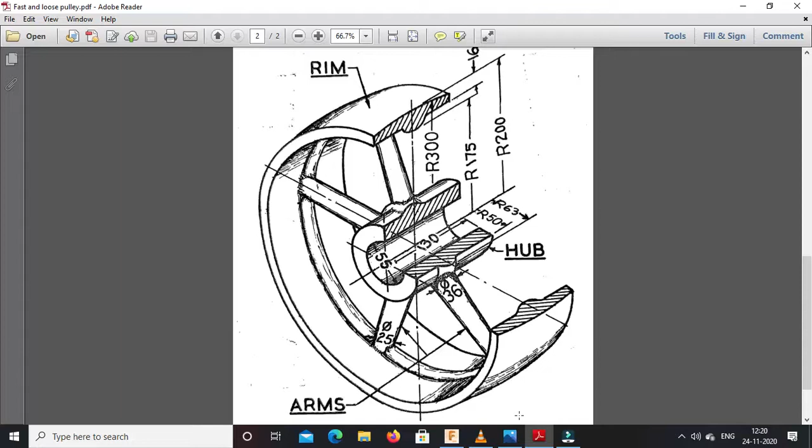Now how is it used? Let us suppose this shaft is there, and this another shaft is there. This is called the driving shaft, that means motion - let us suppose this is an engine shaft, the engine output shaft, it is called the driving shaft. To this shaft one pulley is attached, with the help of a key. So whenever this shaft rotates, this pulley also rotates, so it is called a driving pulley because the motion originates here.

So it is called a driving pulley, and this is the other shaft. As per the requirement, we want to transmit motion from this shaft to that shaft. That means whenever this shaft is rotating, as per our requirement, we want that shaft to be rotating or stopped. So whenever we want to transmit the motion, we will make one arrangement, and whenever we want to stop motion transmission, we will make another arrangement. So now how is it achieved with the help of a fast and loose pulley?

This rectangular portion is nothing but the belt, made of leather or any rubber material. I think in the flour mill, the ancient flour mill, you have seen the belt drive. So there is a wheel like structure, a pulley, and over that one belt is provided.

Okay, so whenever the driving pulley is rotating, along with that shaft will move, that belt is going to move over the other pulley, and it will also rotate the other pulley. So it is called a belt drive.

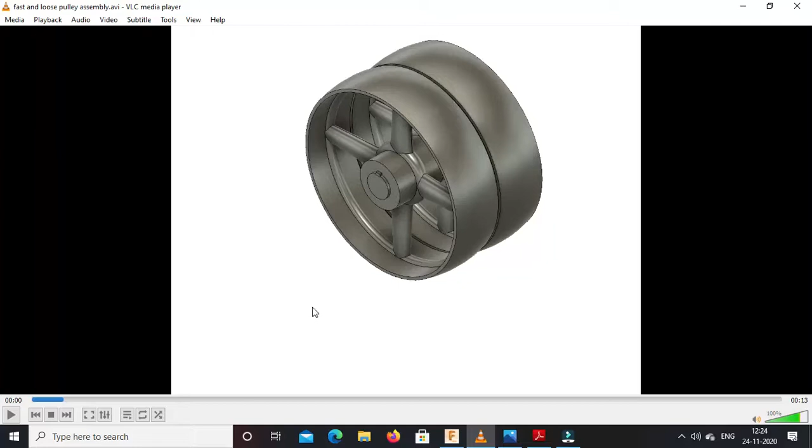So if I run this video, you will see the animation, how those parts are connected. So this key is going to come outside, then this fast pulley. If you observe, this is the loose pulley.

One more component is called a bush. So this part is called a bush. It is fitted on the shaft, but there is a loose contact. That means if this shaft is going to rotate, there is no locking between this shaft and bush. So the bush will remain as it is. So whenever the pulley is going to rotate, it is not going to transmit motion to this shaft. The loose pulley is going to rotate all alone.

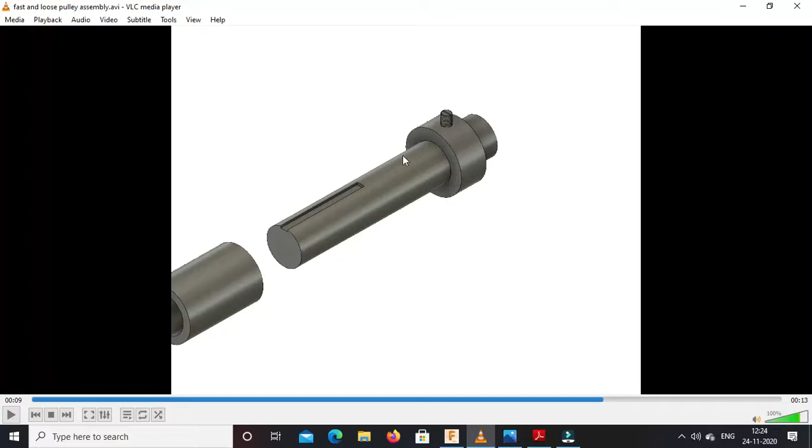And this is one locking arrangement. It is a collar, the circular ring part is called a collar, and it is attached to this shaft making use of a screw, or a pin-like structure. So this is nothing but the arrangement of the fast and loose pulley.

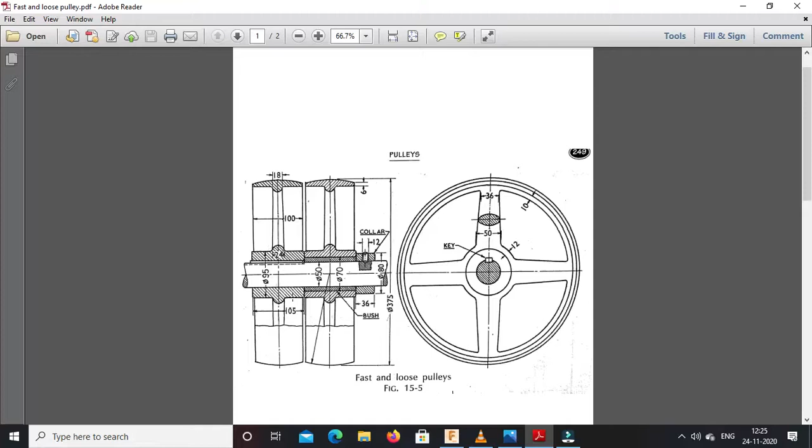So we need to prepare these parts on the Fusion 360 software. Now, how the pulley is - this is basically the view for the assembly. This is the sectional front view, and this is the side view.

Okay, so if you observe, this pulley has 4 arms. These are the 4 arms of the pulley, and this outer part is called the rim. This central part is called the hub. Now in order to find out its dimension, you must be able to correlate those two views.

Now if you observe, this hatch portion is in the form of an ellipse. So the cross section of this arm portion is in the form of an ellipse. So this arm is in the form of an elliptic shape, not circular, though it appears so in this diagram.

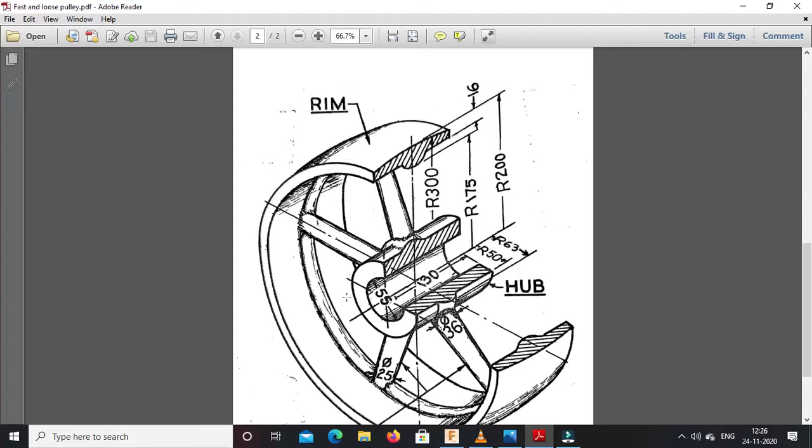Now what is the diameter of the shaft? If you observe over here, this diameter is 50, which is nothing but the shaft diameter. Then the outside diameter of the hub - just do not consider these dimensions given on this diagram. In our case, this central diameter is 50, and this outer diameter you need to find out from this figure. So this is 95, this diameter is 95.

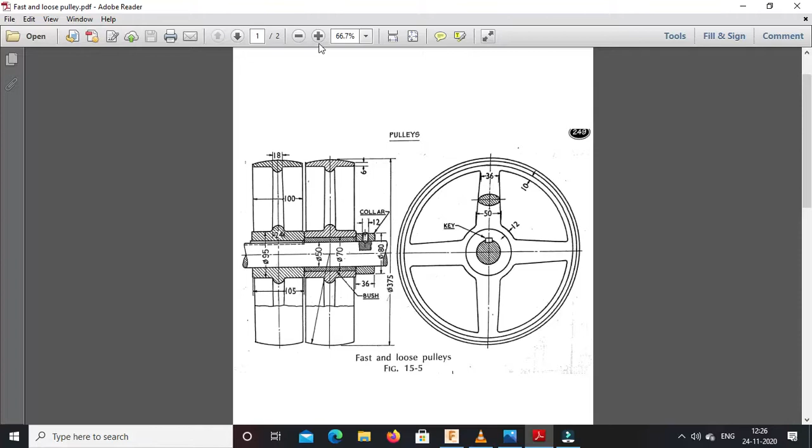Then over here this ellipse is there. So as this cross section is ellipse, at this position it is elliptic. Now major axis is 50mm and minor axis, if you observe over here, it is 24. So minor axis is given as 24 and major axis is 50.

So now in order to create the pulley, first of all we will start with the central portion, that is the hub of the pulley. If you observe, it is having rotational symmetry along this central axis, so using the revolve feature we can create this hub as a central part.

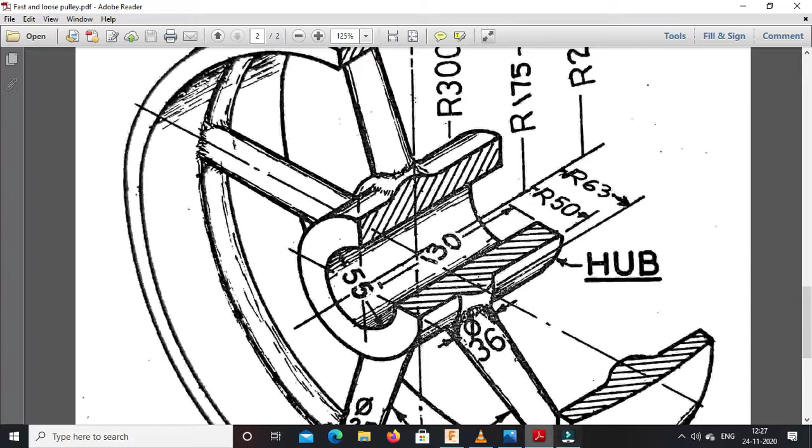And how much is the total width along the axis of the hub portion? This total width for the hub is 105, and for the rim that width is 100. So just do not get confused between width of the rim and width of the hub. For the hub, that means this hatch portion, width is 105, and for the rim portion width is 100.

So we want internal diameter as 50, external diameter as 95, and we need to draw this elliptical portion. Total length for the revolve feature is 105. So we will draw just this sectional cross section for the hub, and then using the revolve feature we will create the central hub portion.

So just go to Fusion 360 software.

Now as per the orientation we need to select this plane, because whenever we select this as the axis for revolve, this will be the orientation of the hub. So just go to this plane, right click on it, go to create sketch mode. Just let me explain this mode.

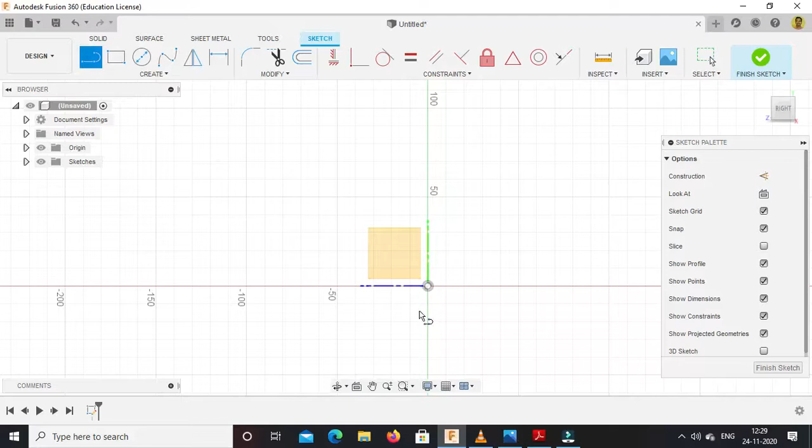So we are in the sketch mode now. We want to draw that sectional portion. First of all, start with the line option, line command, starting with this. Just go over here. So total width we want is 105, so half of that is 52.5.

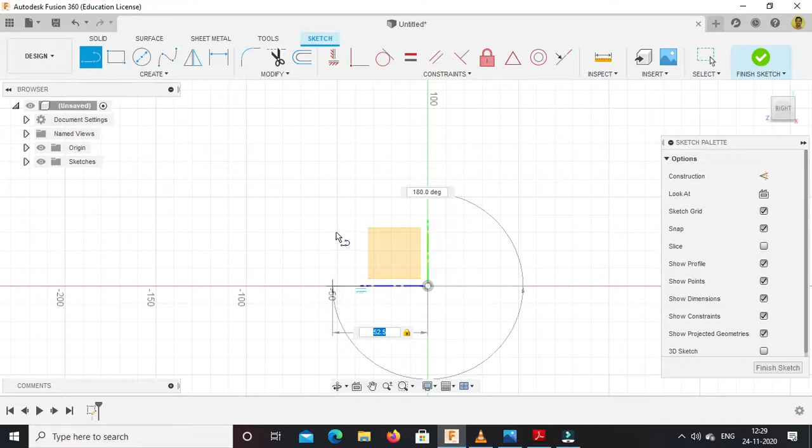Now from this, total outer diameter is 95, so half of that is 47.5. Press enter.

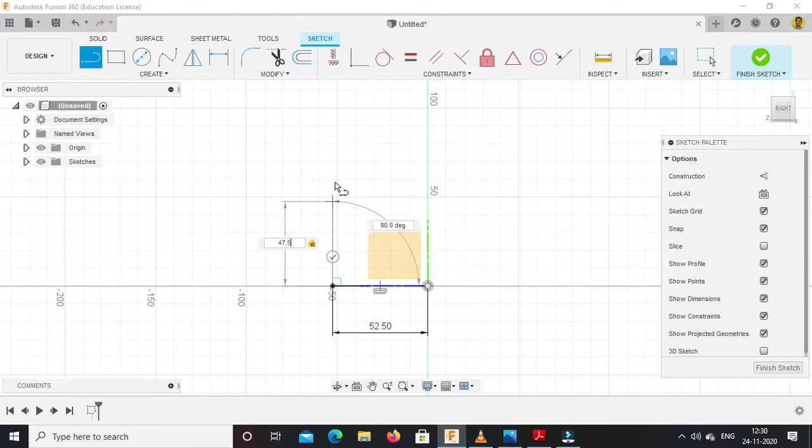Again go to line option, then again 105 total. Now we will come back to 47.5 minus 25, because we want this much height. So this is 47.5 radius and this one is 50, that means radius is 25. So 47.5 minus 25, 47.5 minus 25, and we will connect it over here.

Then we will draw a circle over here of diameter 24. Let us draw a circle of diameter 24.

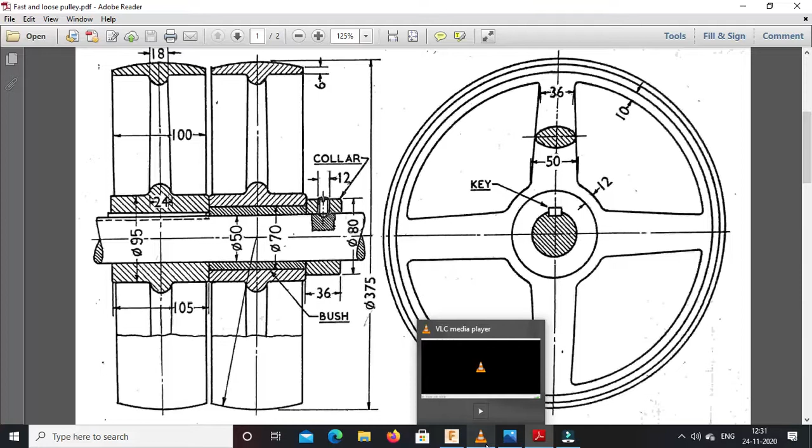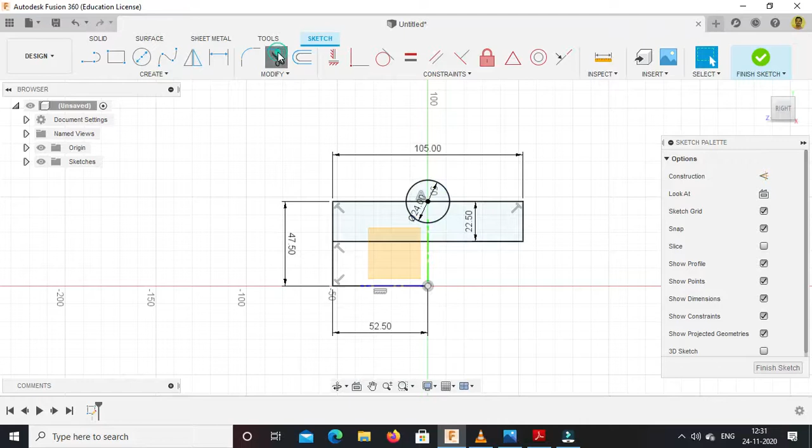Okay, now we will remove the unwanted portion. So this one is the cross section that we want. Now finish the sketch mode.

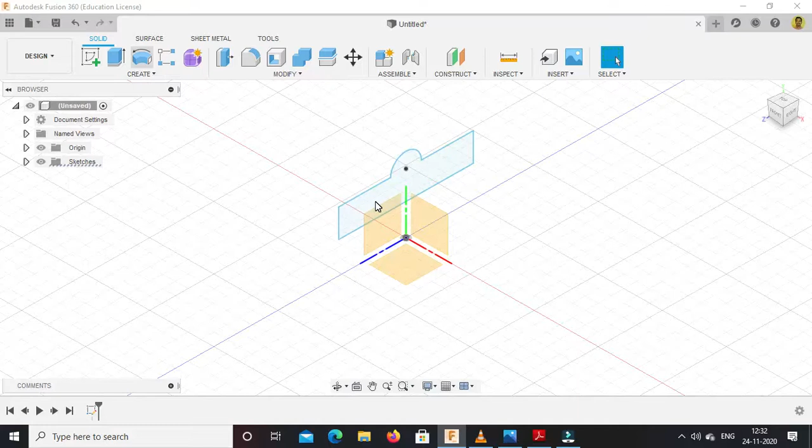So this is the cross section of the hub that we have provided. Now use the revolve feature. So this is the profile. Now select the axis for the rotation, this one. So using this central axis we have revolved this hub. Now press OK, so this is nothing but the hub of the pulley that we have created.

Now next we want to prepare a rim, then we will join that hub with the rim with the help of an arm. So for this one, if you observe, the total diameter is 375, that means this circular portion is having a diameter of 375. Then what is the width of the rim? It is over 100, and thickness is 6 over here.

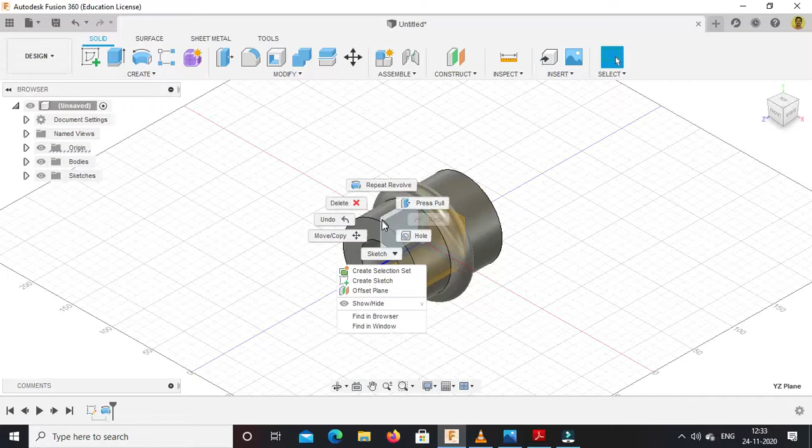From this portion, first of all we will draw one circle of diameter 375. Then we will take this distance as 100, and then 6 mm from this point of intersection. So 375, again select this place, go to create sketch option, using this as a center, draw 375 diameter, press enter. We are drawing here the cross section of the rim portion.

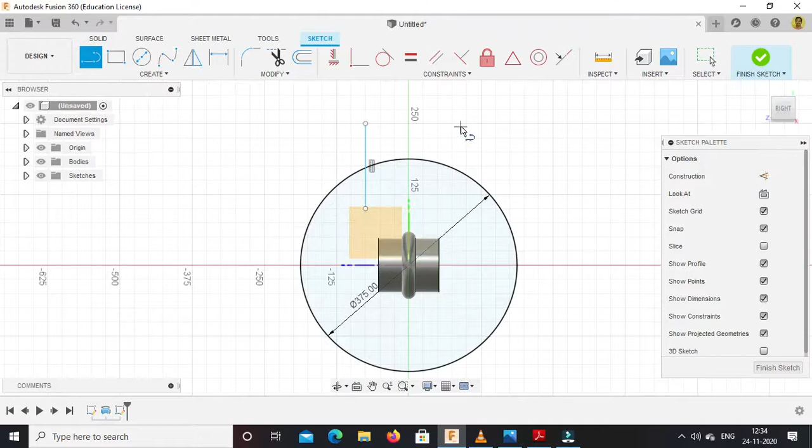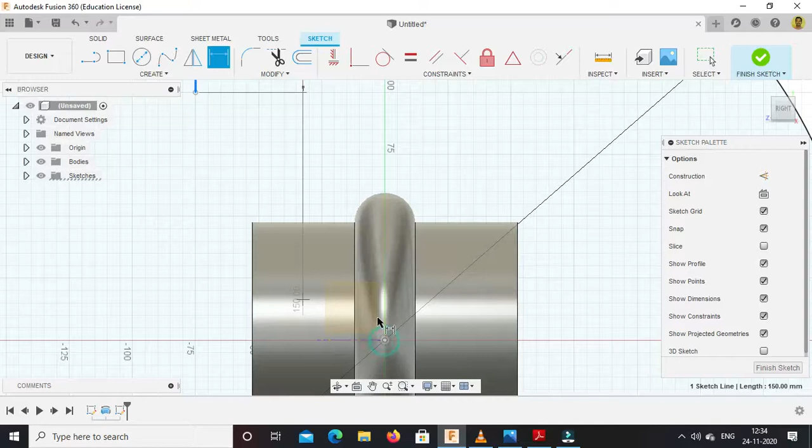Now just draw one line over here. Again select this, draw one line over here, press escape. Now go to dimension option, so total we want as 100, so half distance should be 50. Similarly on this side also we want 50. Press enter. Now we will draw one more line over here.

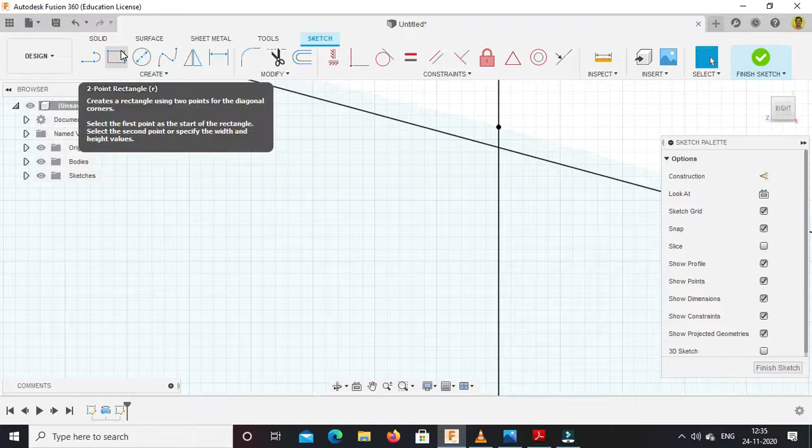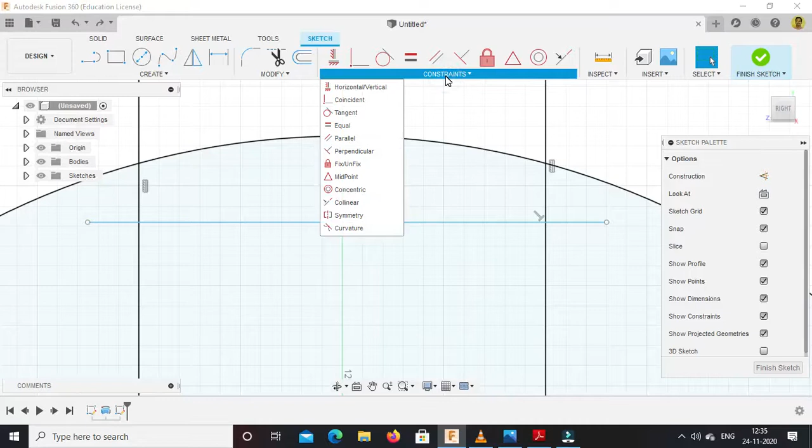Press escape. Now we want to place one point over here on this intersection. We will undo this. So we have placed one point at this intersection.

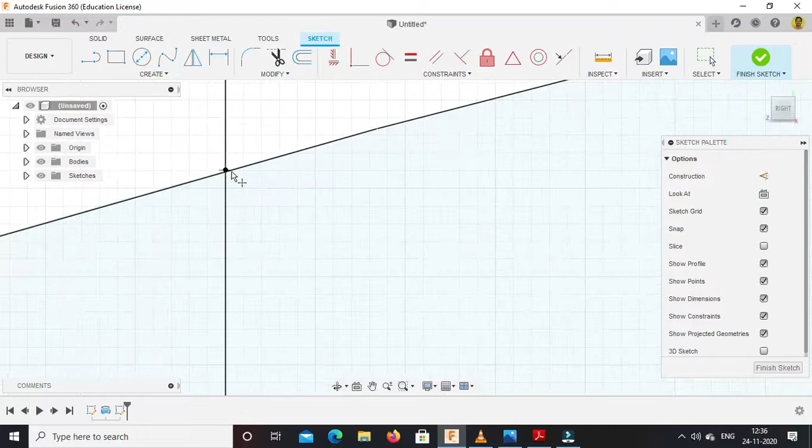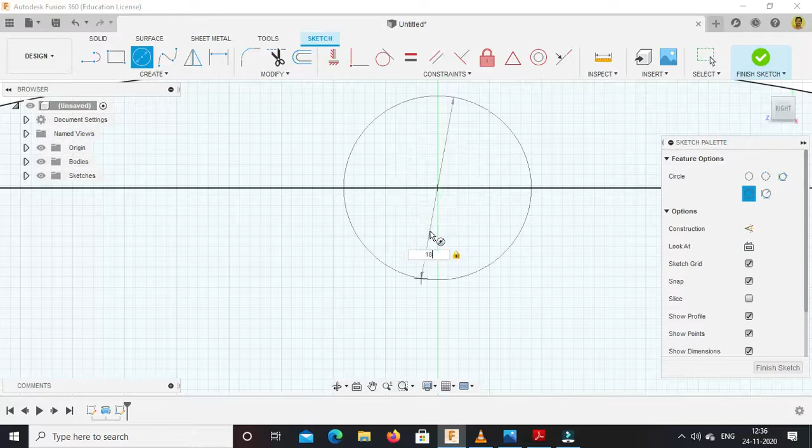Now use dimension feature, or first of all we will fix this point. Then using dimension feature, from this point we will give dimension as 6 mm, like this. And again we want to draw one circle of diameter 18, half circle of diameter 18 over here. So again go to circle, press enter. Now we want to remove the unwanted portion, so just go to trim option.

Now finish this sketch mode. So if you observe, we have drawn this cross section of the rim. Now again using revolve feature, select axis as this one, so we will get this rim. Finish sketch. So we have prepared this hub and this rim.

Now we want to connect this hub with the rim. So for that purpose, as I have shown you, this cross section of the arm is elliptical, and it is not constant because at the base near the hub the major axis is 50, and at the rim major axis is 36. Similarly, minor axis here is 24 and minor axis near the rim is 18.

So we will draw two ellipses, at the hub and at the rim. Dimensions for which will be 24 minor axis and 50 major axis, and near the rim 18 minor axis and 36 major axis. So just go over here.

Now we can't select directly a plane over here, so with respect to this plane we want to take another plane. So go to construct offset plane. Now the offset plane should be parallel to which plane? Horizontal plane, that means this xz plane. And at how much distance?

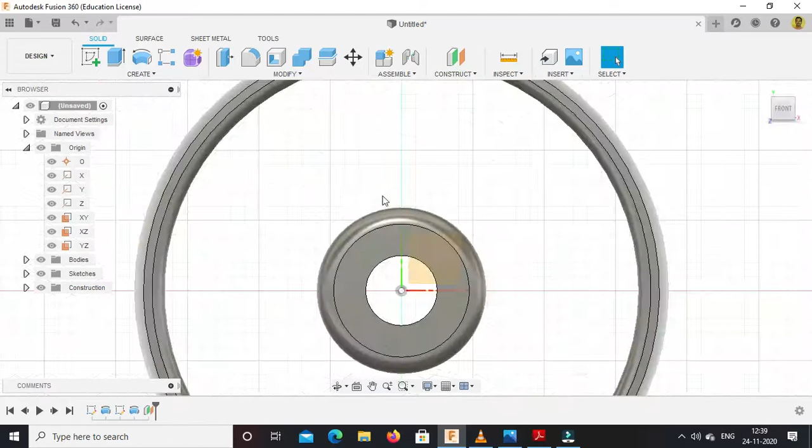This outer diameter of the hub is 95, so radius is 47.5, so at that much distance we want that plane. So now if you observe, this second plane is at this level, passing from this point.

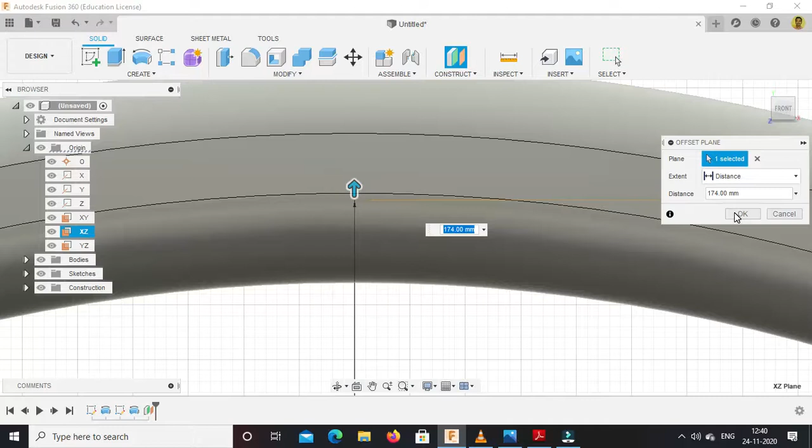So now we will select that plane, or I will just draw another plane also which is required at the rim. So again go to offset plane option. Now again with respect to this horizontal plane, instead of giving dimension over here, I will drag this plane as per my requirement. I will drag it up to this point, so approximate dimension is 174. I have dragged it to 174. Now press OK.

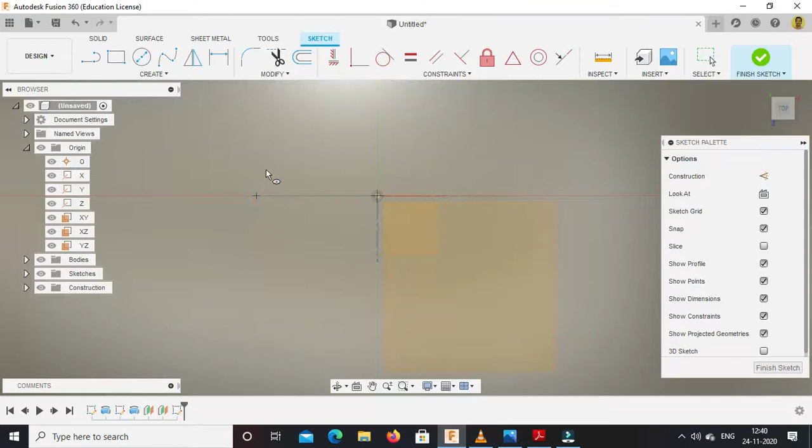Now go to this plane and construct an ellipse, of major diameter 50. Major diameter is 50 and minor diameter is 24. I think we'll check once again, so it is 24. Minor axis is 24, major axis is 50. Press enter.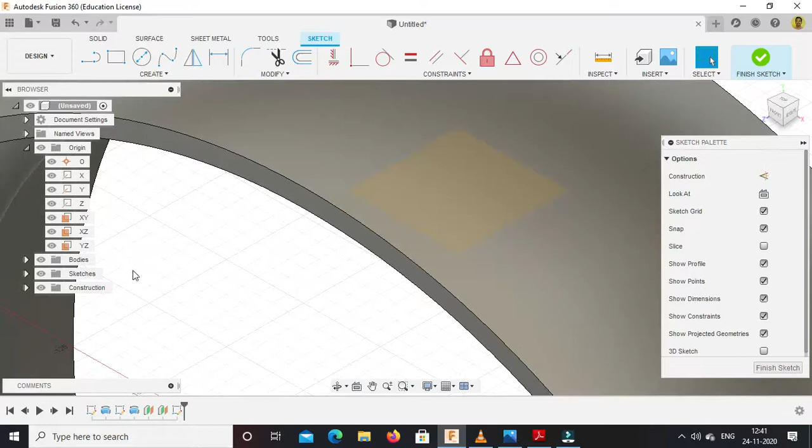So this one ellipse we have created, and on the other plane go to create sketch option. We want another ellipse. Now here the major axis is 36 and minor axis is 18.

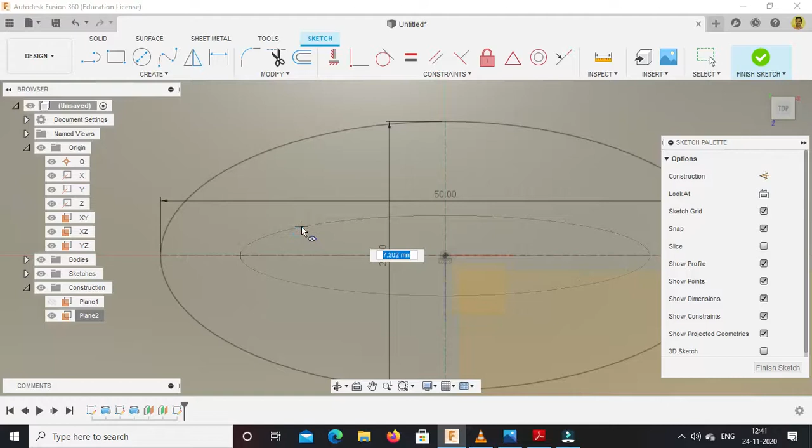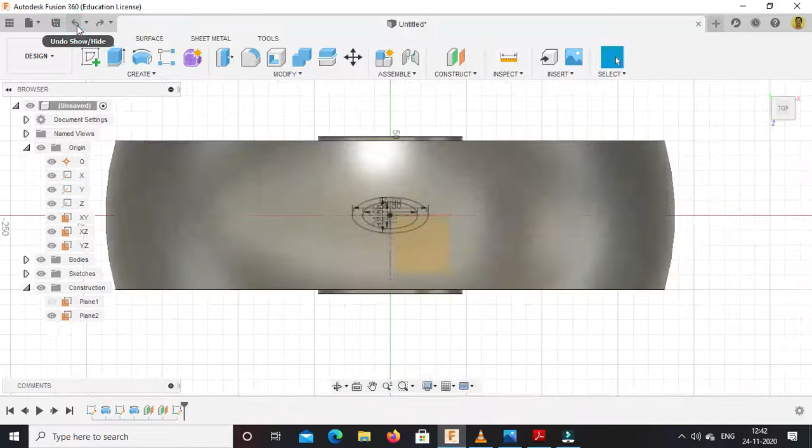Now finish sketch. Now in order to connect these two, sorry, I have mistakenly drawn it on the same plane, undo this. We want this. Finish the sketch mode.

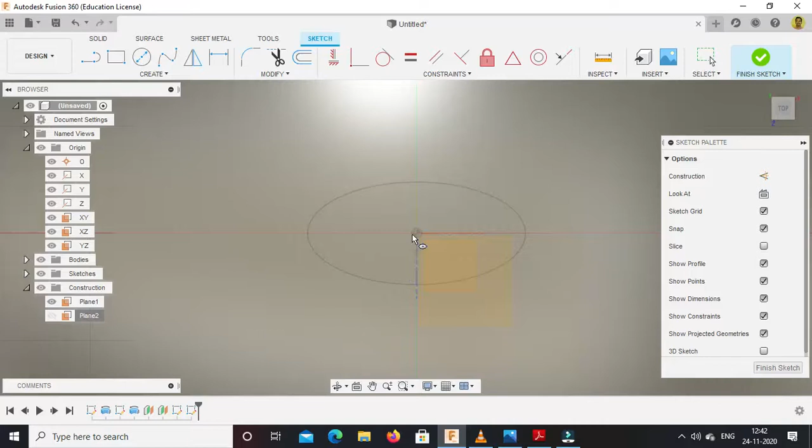Now go to this second plane and now create sketch, so we will draw an ellipse over here. Select the center point. Major axis is 36, minor axis is 18. Press enter.

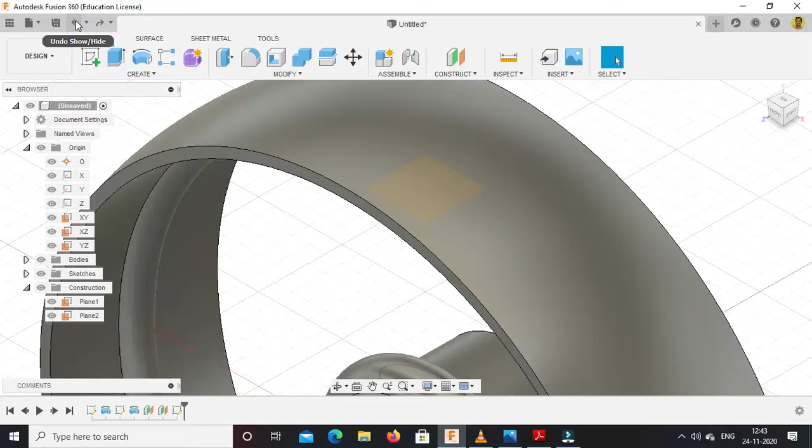We'll undo it. We will draw once again. Thirty-six and 18.

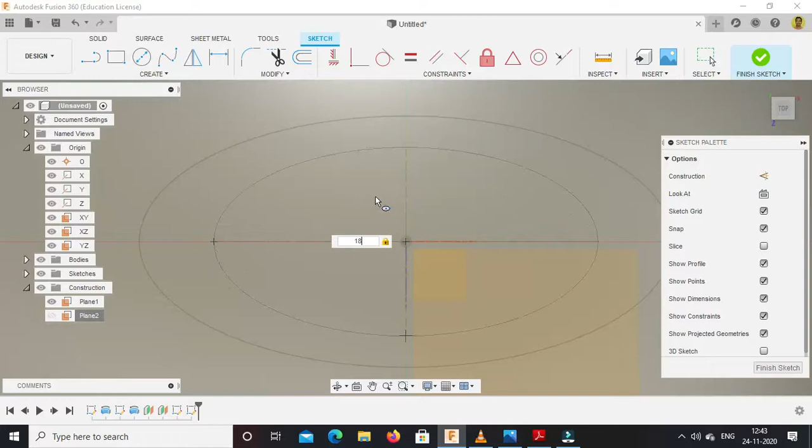Okay, so now finish the sketch. So now we have drawn one ellipse over here and one ellipse over here. Okay, so now as the cross section of the arm is not constant, we have drawn these two ellipses.

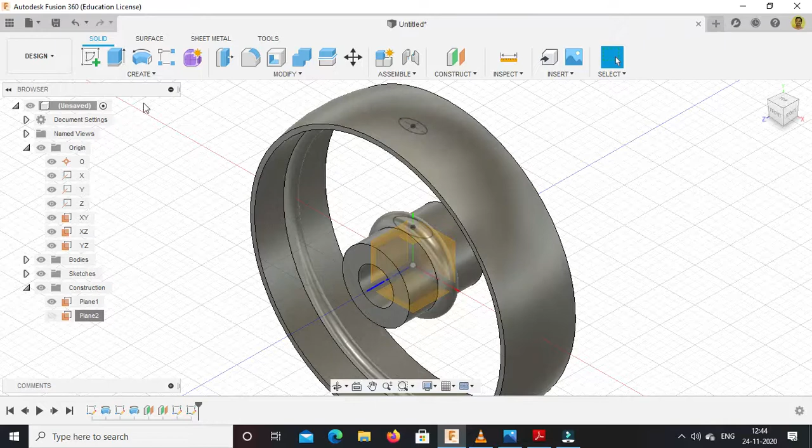Now using loft option we can connect these two cross sections. Okay, so just go to loft option, select one profile over here and select another profile over here. And press OK. Undo this. Loft.

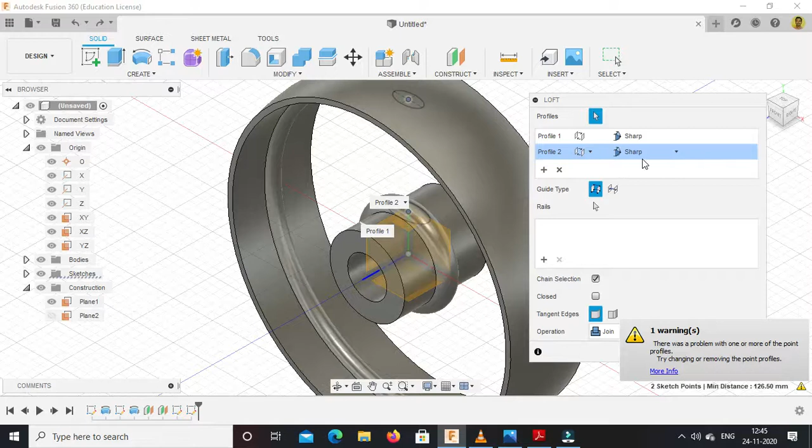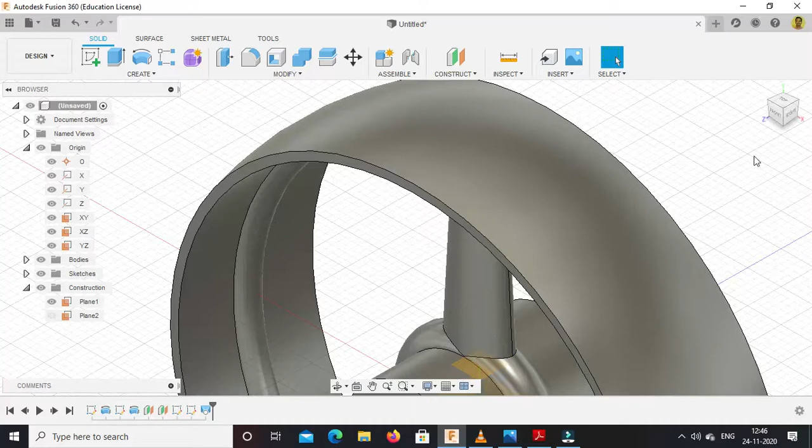Okay, so using loft option we have selected that two profile planes, and instead of operation cut you should select join. Okay, so by default it was cut, so that's why the whole was cut. Now join. Okay, press OK. So in this way we have created one arm.

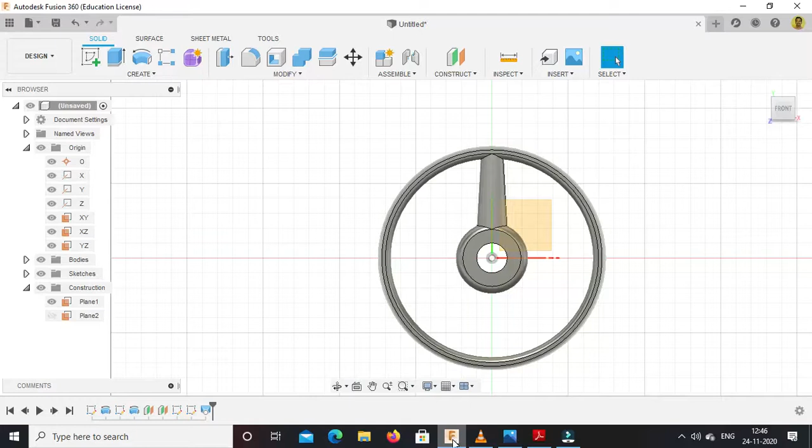Okay, so similarly we want four such arms, because in this pulley four arms are there. Okay, so instead of again using loft option each and every time for creating four arms, what option we can use? We can make use of a pattern option.

Okay, so just go to circular pattern option, then select over here feature, then select this arm from the timeline. Axis should be central axis. Okay, and how many arms we want? We want four arms, total four arms throughout the 360 degree. Okay, so just press OK.

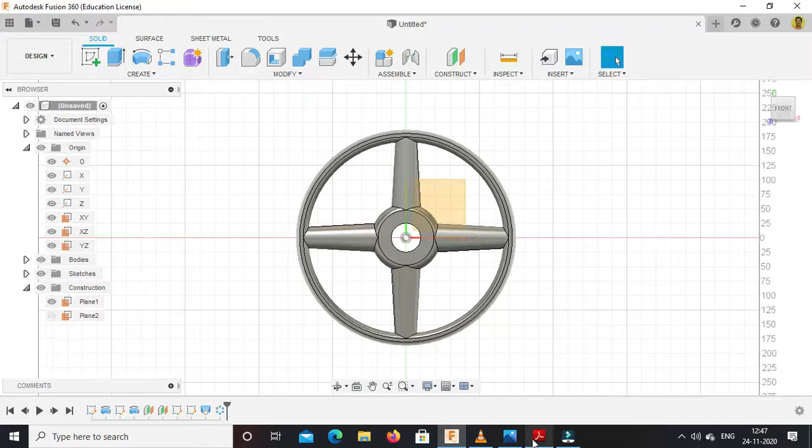Okay, so in this way we have created all the four arms. Okay, only one thing remaining for this pulley is we want to cut a keyway over here. Okay, so for this keyway, dimensions for key are not provided, so we will take it as per our convenience. Okay, so just go to this face.

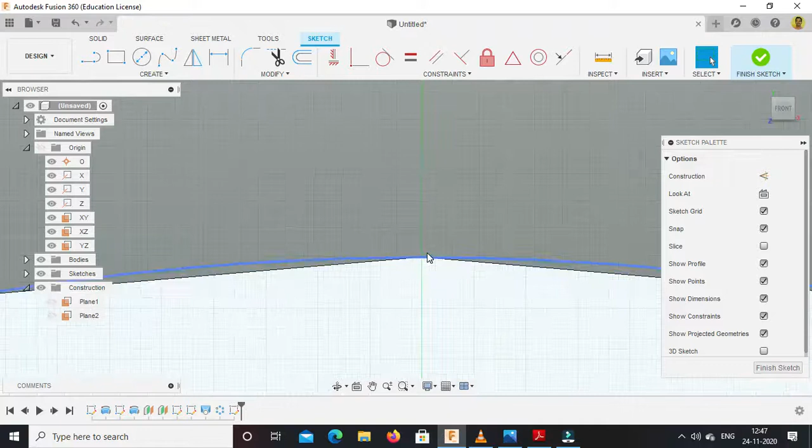Now go to create sketch option. Now we will draw one rectangle over here as per previously we have created this type of keyway, center rectangle.

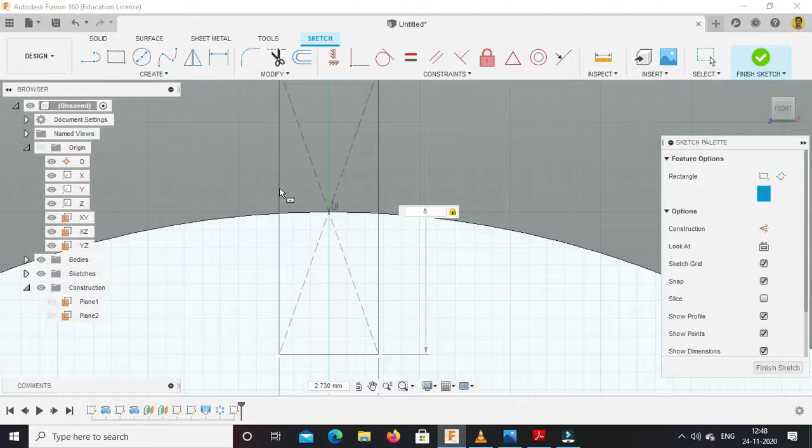Place center point over here and let us suppose cut a keyway of 10 by 8. We will see whether it is okay. So it is enough, 10 by 8 is enough. Okay, so press enter.

Finish this sketch mode. Now using extrude cut option, we will cut the keyway. Okay, and we will cut it throughout the length.

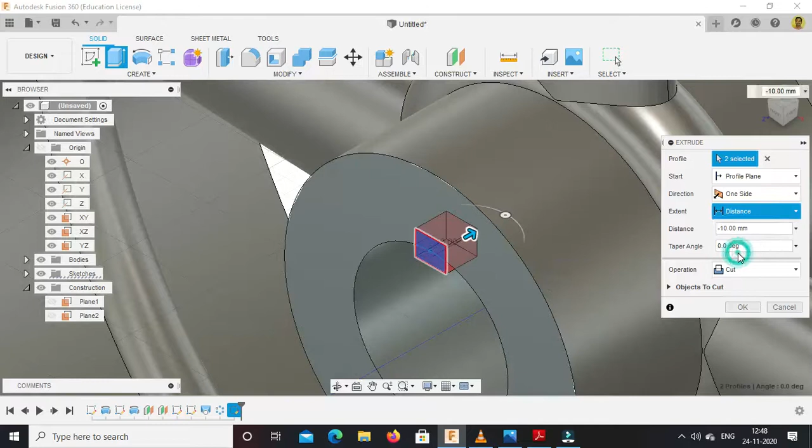Okay, because for the fast pulley it is throughout its hub length. Okay, so we will cut it through. So distance or extent should be all throughout the hub length. Okay, and operation is cut.

Yes, okay. So in this way we have cut the keyway for this fast pulley. Okay, so we have completed the fast pulley. Now we will save it. Okay, so just go to save option.

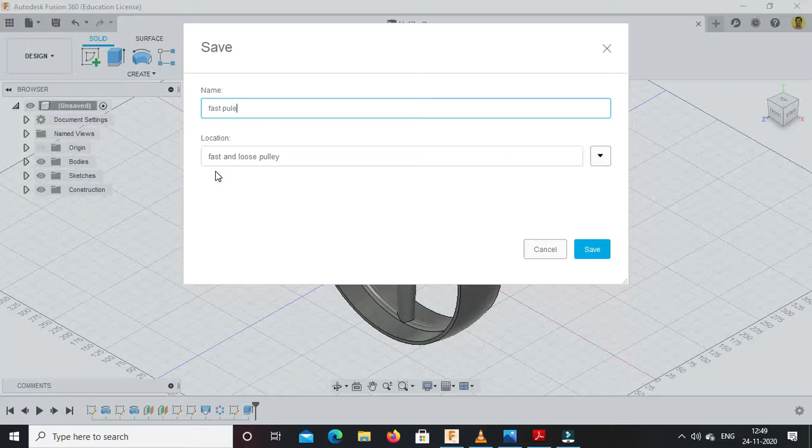Fast and loose pulley is there. So just enter fast pulley. Save.

Now if you observe the other, so loose pulley is same. Okay, only difference is that it is taking time for saving. Okay, so in the loose pulley all other things are same. That means hub is same, that means exactly not same, but only change in the internal diameter.

Okay, so this center hatch portion is nothing but the bush. Okay, and outside that there is a loose pulley. Okay, so inner diameter for that hub is 70. Okay, and outer diameter is same as 95. Okay, and rim is also same.

Okay, so we will just make some changes in this pulley and then we will save it as a loose pulley. Okay, so we want to make the internal diameter as 70. Okay, so in this case it is 50. So just we will go to create sketch option using this face.

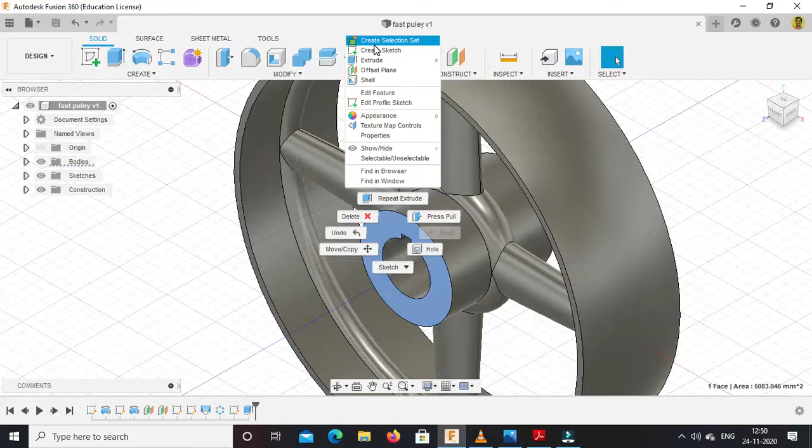Then just draw a circle of 70 mm diameter. Press enter. Okay, finish the sketch mode and extrude.

Okay, and we will select this. Okay, so just we will remove this material. Distance should be all. Okay, so by this we have removed the central portion. Okay, so now internal diameter is 70, outer diameter is 95, and all other things are remaining.

Okay, so now this is loose pulley. Okay, so you should take care that you do not just save it. Okay, just saving will make change in the fast pulley. Okay, so while saving this, just go to file and select the option save as.

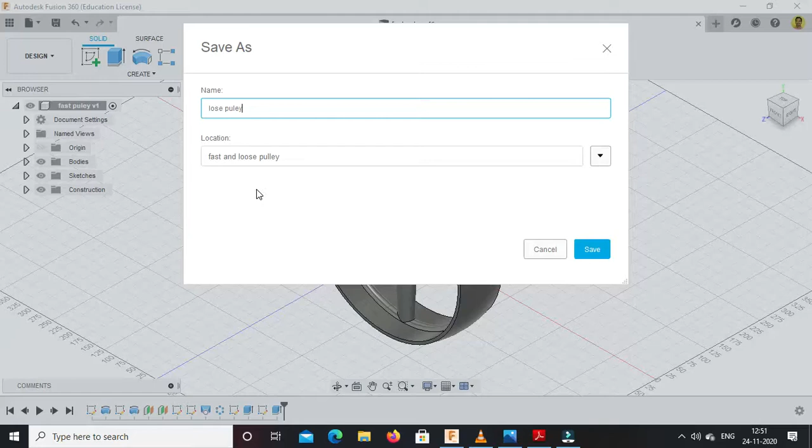Loose pulley. Okay, so it has reduced your work because by making some changes only to the fast pulley you have created the loose pulley. Okay, so now we have created a fast pulley, we have created a loose pulley.

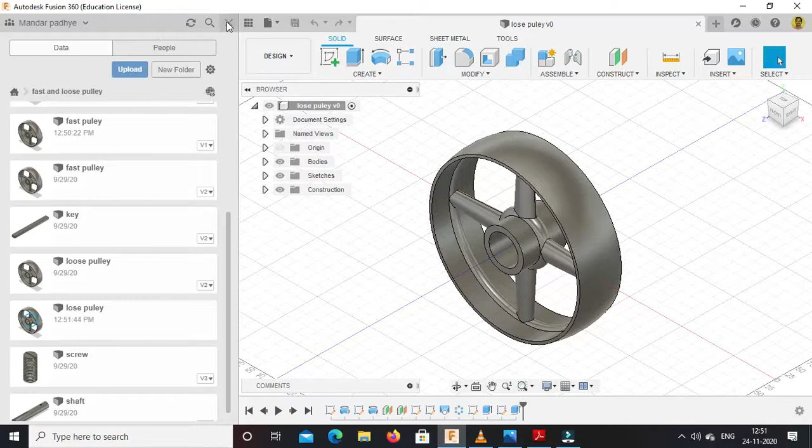These are the parts which I have prepared earlier. So now this is the fast pulley that we have currently made. Okay, then the loose pulley is there. Then next portion is what? Just go to another window.

Now we will prepare this bush. It is very simple, just a cylindrical portion. Inner diameter is 50, outer diameter is 70, and length is equal to the length of the hub of the pulley, that means 105. So we will make use of a simple extrude feature.

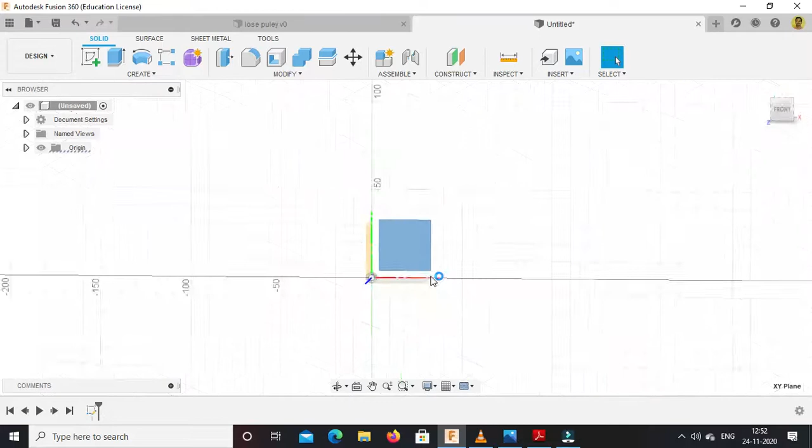Go to create sketch option, draw two circles: 50 diameter, enter, then again draw a diameter of 70, press enter, and now extrude it. Use the symmetric option, direction should be symmetric, and total distance should be 105.

That is the length of the bush required. Press OK. Keep in mind that we will use this part for the assembly purpose. So while saving, convert it into create components from bodies, then save it. We will save it as bush.

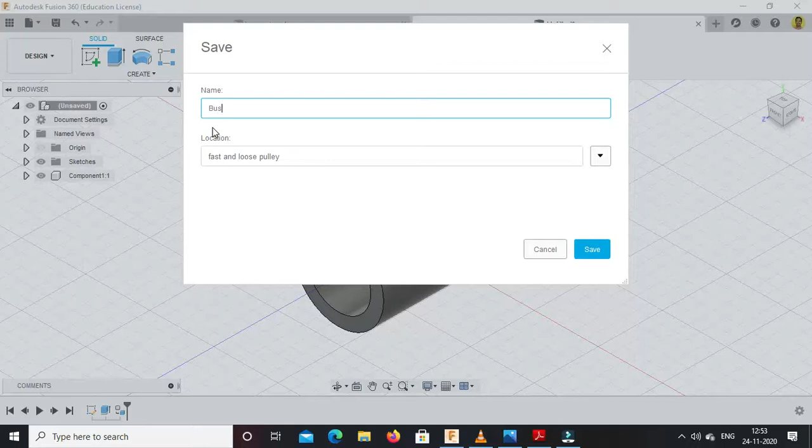Now the next component is this collar. We will prepare this collar. It is also simple. Length of the collar is 36, inner diameter is 50 and outer diameter is 80. Keep in mind that for the collar, outer diameter is 80 and length is 36, inner diameter 50. We also want to drill one threaded hole.

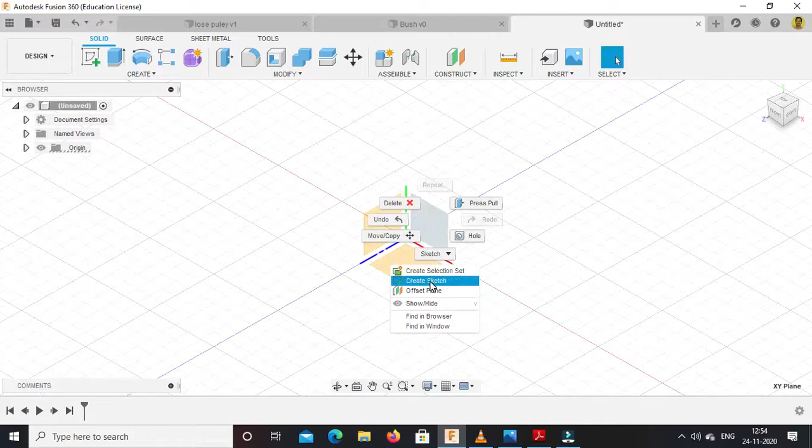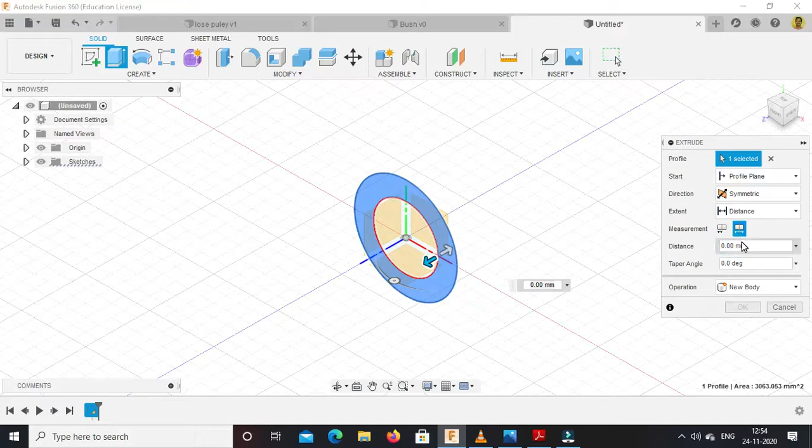Go to create sketch again, inner diameter 50, press enter, again 80, press enter, finish the sketch mode, make use of the extrude option on this cross section, symmetric, total distance should be 36, press OK.

Now through this collar we want to drill one hole for locking with the shaft. A threaded pin is shown, of diameter 12, and it should be on the upper side. So we will prepare that: select this plane, go to create sketch option, draw a circle of diameter 12, press enter, finish the sketch mode.

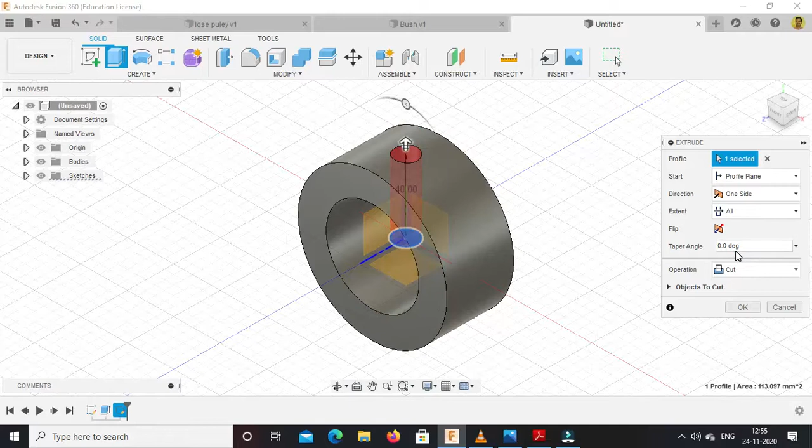Now we will extrude cut. Extent should be all, and we will select the option as a cut. So either you can keep it as a whole hole as it is, or you can make it threaded. Right now I will keep it as it is, it is not needed to make it threaded.

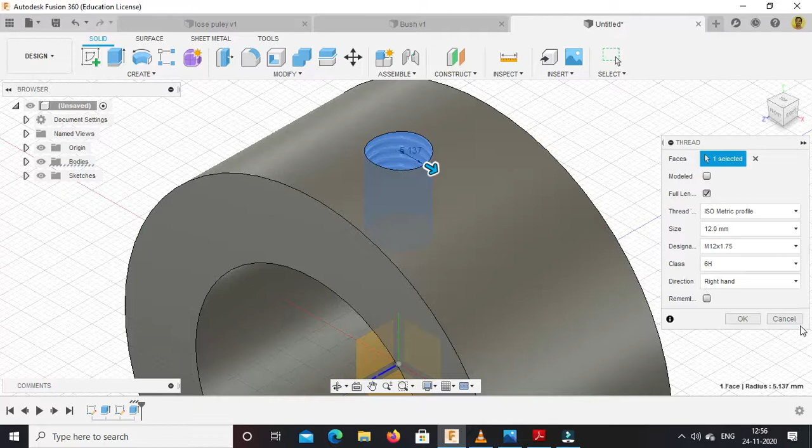You can use a simple pin, similar to the pin used in the footstep bearing. If you want to give threads to it, you can use the thread option, select this internal face, and give threads as per the requirement. But I am keeping it as it is for now. Again save this, create component from bodies and save it as collar. I will not explain further since you are already familiar with this now.

Now next we want to prepare a pin. This pin is required with diameter 12. This diameter is 80, that means radius is 40, and here it is 50, so 25, so 40 minus 25 is 15. We will keep 5 mm in the shaft.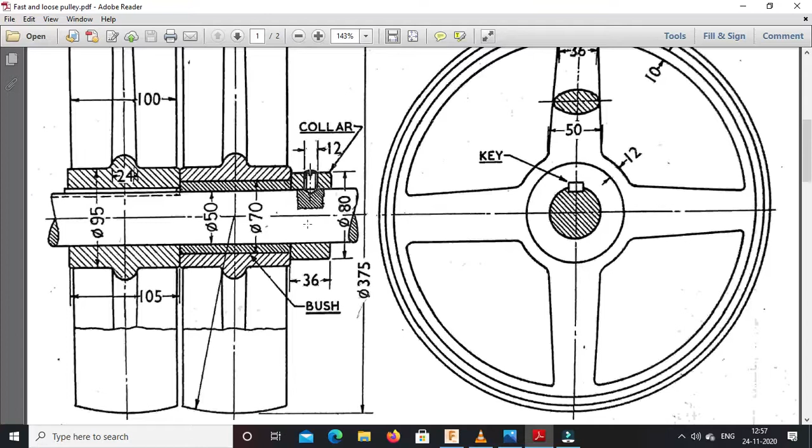This pin, the screw-like structure, is going to enter into the shaft also. Let us consider 5 mm is there in the shaft, remaining 15 mm, and suppose 5 mm on the upper side. So total length should be 15 plus 5 mm extra and 5 mm in the shaft, total 25, and diameter is 12.

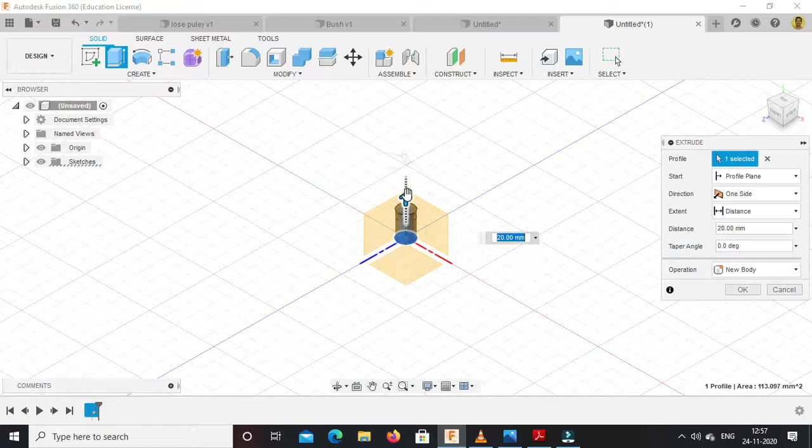So again on the horizontal plane, create sketch, draw a circle of diameter 12, press enter, finish the sketch mode. Now extrude it for a total distance of 20.

Press OK. Again create a component from it and save it. Okay.

Last part which is remaining, we have prepared this fast pulley, then we have created this loose pulley, we have prepared this bush, collar, pin. So two more parts are remaining, that is nothing but the shaft and key. Okay, so we will prepare the shaft now.

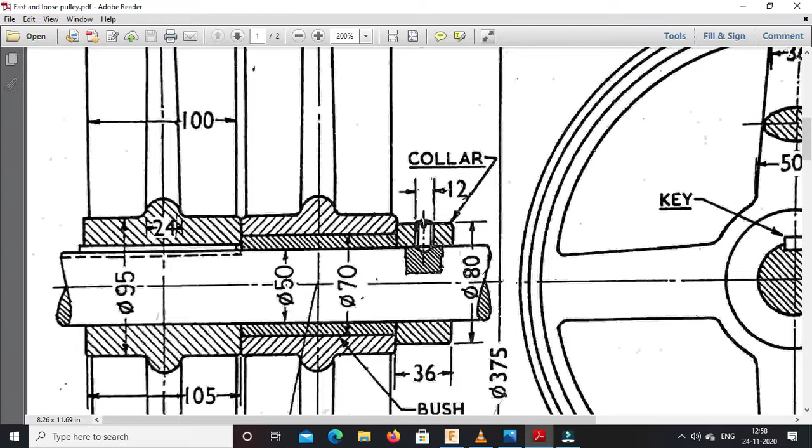So diameter is 50 and now total length of the shaft. Okay, so you need to calculate the total length. If you observe, this 105 is the hub length.

So total distance is this 105 plus for loose pulley 105, so total 210 plus this 36. And we will keep 10 mm extra on this side, left side, and 20 mm extra on the back side. So total how much is the distance? This 105 plus 105 is 210.

210 plus 36, so 246, and this 20 mm on this side and 10 mm on this side, so 30. So 246 plus 30. So total distance is 276. So we will keep it as 280, let us suppose.

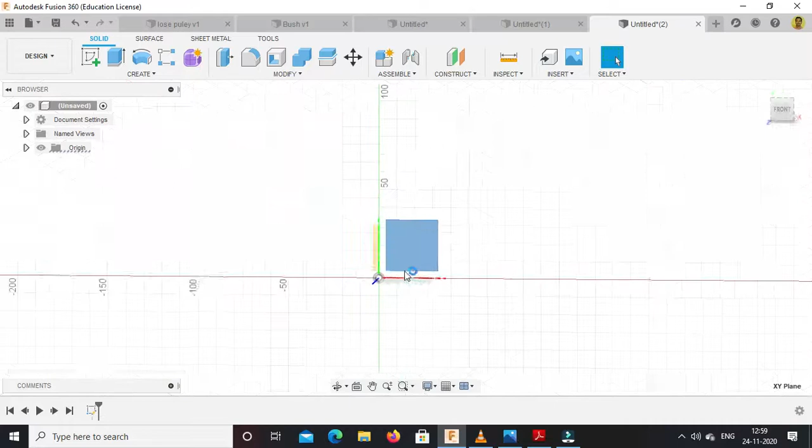Okay, so just go to create this plane, go to create sketch option, draw diameter 50, press enter, finish this sketch mode.

Now total length we require 280. Total length should be 280.

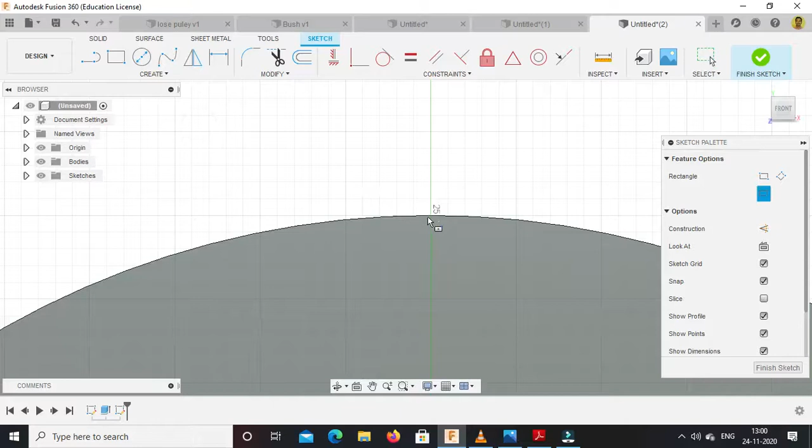Press okay. Now we want to cut a keyway over here. So again select this face, go to create sketch option. Now again draw central rectangle, 10 by 8. Press enter, finish the sketch mode.

Now length of the keyway should be how much? We have kept 10 distance on this side. So this 10 plus 105, that means 115. That is the length of the keyway which is required.

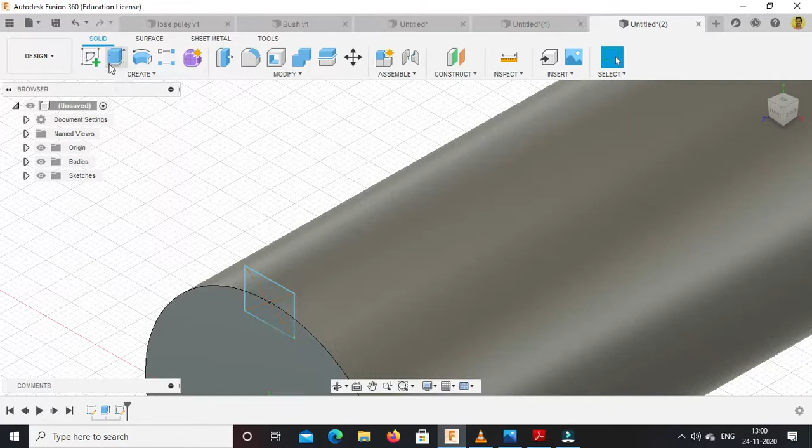So using extrude cut, minus 105, sorry, 115. That much distance we want to cut a keyway.

And final thing which is required, we want to drill a hole for this pin which is going to insert commonly into the collar and shaft. So how much distance it should be?

So this 10 plus this 105, this 105. So 210 combining both pulleys, and then 10 mm on this side. So 220 and half of the 36, that means how much? 220 plus 18.

So 238. So at the distance of 238 we want to drill a hole of diameter 12 and depth should be 5 mm.

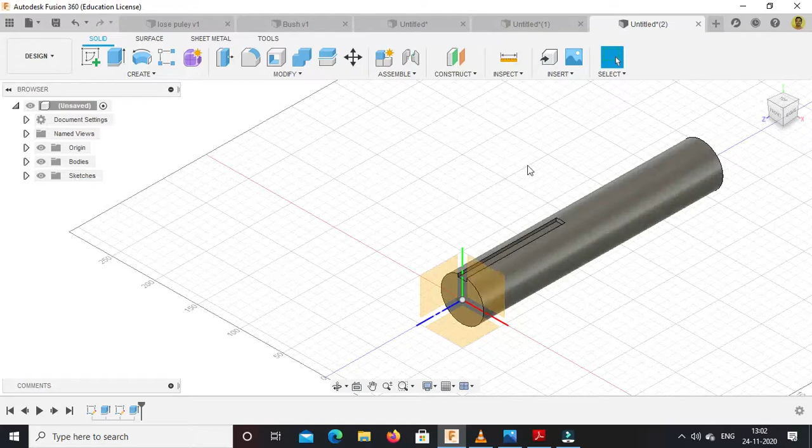Now we can't just draw as it is. So again we will select one offset plane. It should be parallel to this plane, and at a distance of, what is the diameter of the shaft? 50. So at the distance of radius, that is 25. Press enter.

So it is at the radius, that means passing from this. So just select this plane, go to create sketch. Now we want to drill one hole of diameter 12.

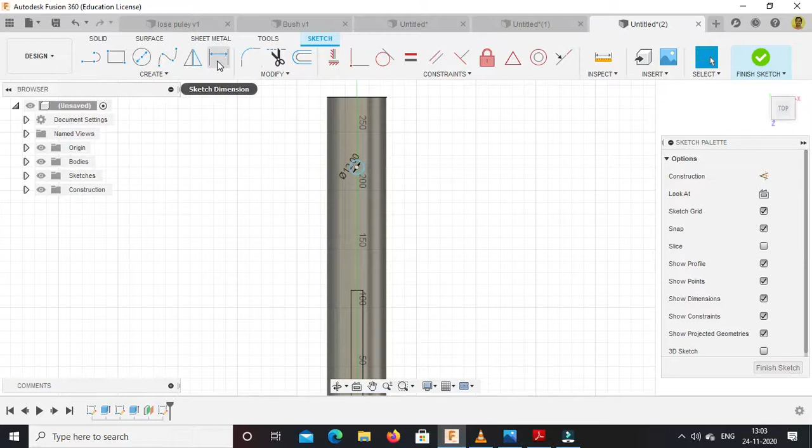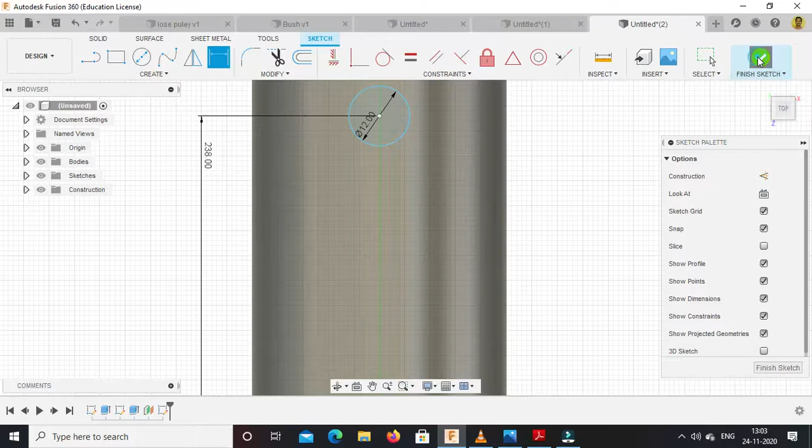So just place one circle of diameter 12, press enter, then give dimensions at how much distance that we want from this circle. So distance should be, we have calculated as 238 to 238. Press enter. So this much distance. Finish this sketch mode. Now using extrude cut option, we will drill a hole.

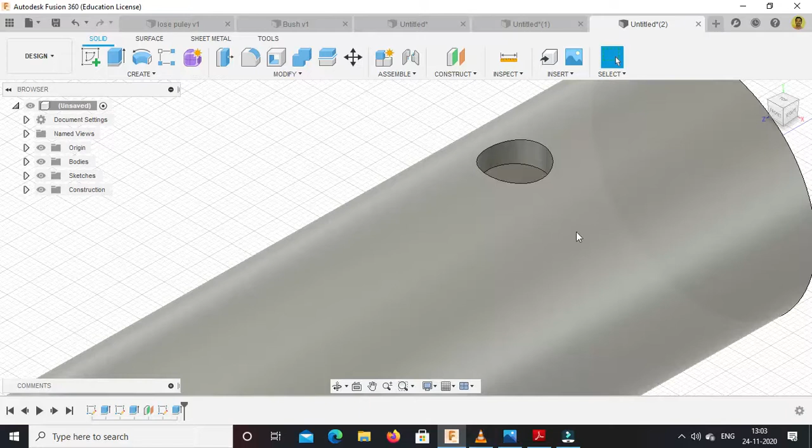So the thickness or height should be -5. Press OK. So if you provide internal threading to collar, same threading you should provide over shaft also, or you can keep it as it is, just for locking purpose.

So this is the shaft. So similarly you can save the shaft also. So with this we have completed all the parts. That means shaft is there, or no, one more component is required, that means key.

Key you should prepare. It is simple again, just a rectangle. You can save the shaft by converting it into a component. So just go to again this plane, go to create sketch option, just draw one center rectangle

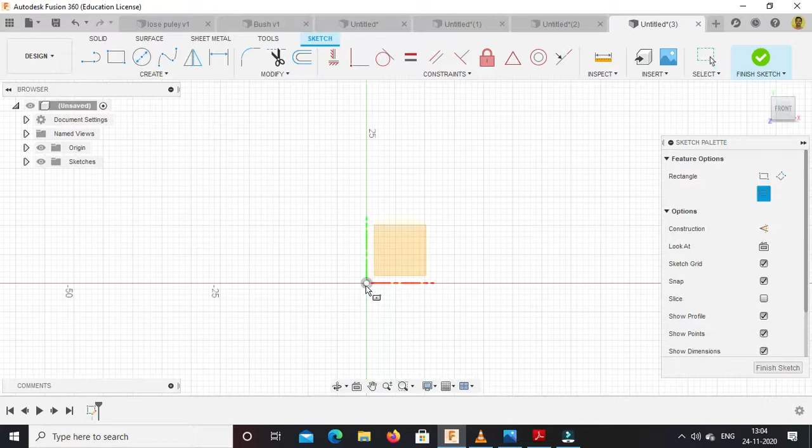of dimensions 8 mm as height and 10 mm as width. Press enter, finish this sketch mode. And minimum length of the key required is 105. So you can keep it as 105, or if you want to keep it 5 mm extra, so 110 or 115, all are okay. So I will prepare the key of 110, let us suppose.